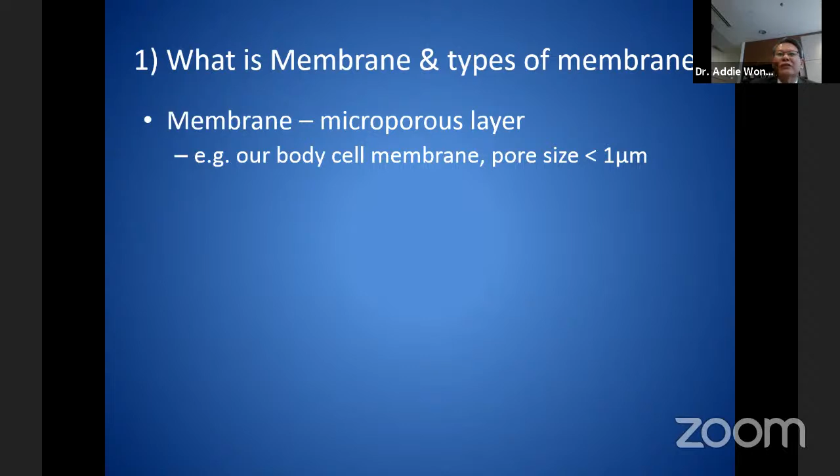What's membrane? Membrane is a microporous layer. Our body cell membrane, for example, those are membranes. The pore size must be below 1 micron. From 1 micron downward is membrane. When you talk about membrane, from 1 micron down to 0.1 micron is classified as microfiltration. Ultrafiltration means 0.1 to 0.01 micron rating. Nanofiltration is 0.01 to 0.001. RO is below 0.001 micron.

In fact, RO is not so much working on straining. It works a little bit on the surface tension principle and the pressure. Membrane is relatively expensive for water treatment, and the operating cost as well, but it produces excellent water quality. Why membrane, since it's expensive? Because there are pollutants such as Cryptosporidium and Giardia, those are protozoa. There are toxic algae, for example, Anabaena and Microcystis.

There are many motile microorganisms, and sand filters are not able to capture them because they can move in between the sand. They pass through the sand filter because they have flagella, they are mobile. For example, Dinoflagellates, the red type, Euglena, which is a toxic algae, Copepods, Cladocera, water mites, and others. Later I will show some photos. So membrane will give us better control and better water quality, of course.

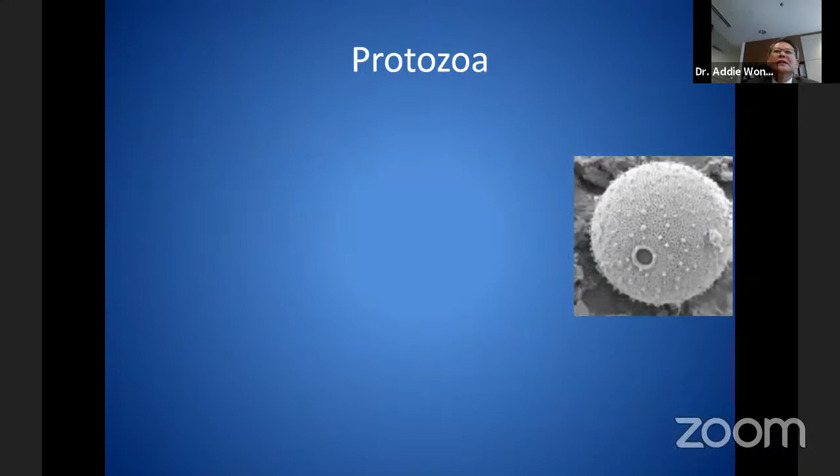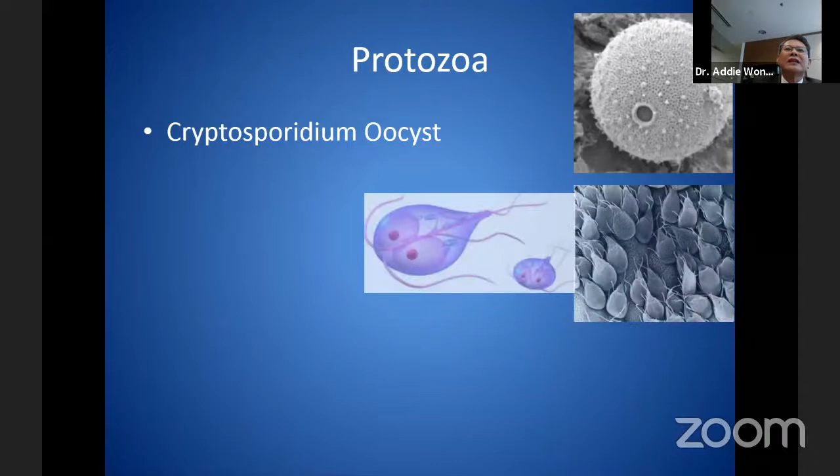This is a photo of Cryptosporidium oocysts. They need a very high disinfection level, very high CT chlorine, to inactivate them. So we need membrane to remove them, because most of the chlorination that we do can't inactivate them. This is Giardia, also the same thing, and Entamoeba. This is how it looks.

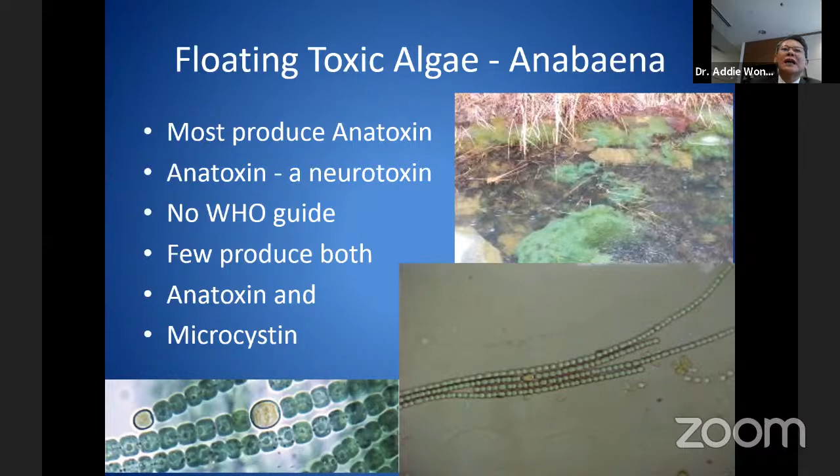During this season, people cannot eat seafood, shellfish, because the algae die and sink into the water, and then the shellfish, all those clams, lala, eat them. They accumulate the toxin, so it can be dangerous. Sometimes in Africa, in a whole dam, the normal green algae turned into Dinoflagellates. It can be very dangerous.

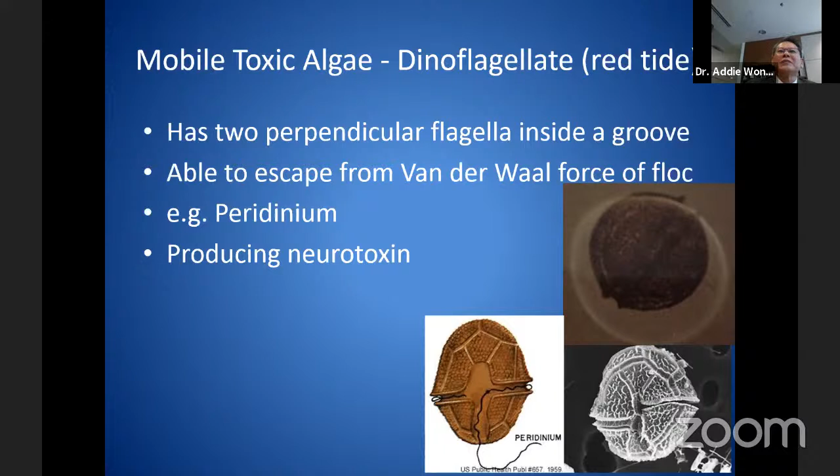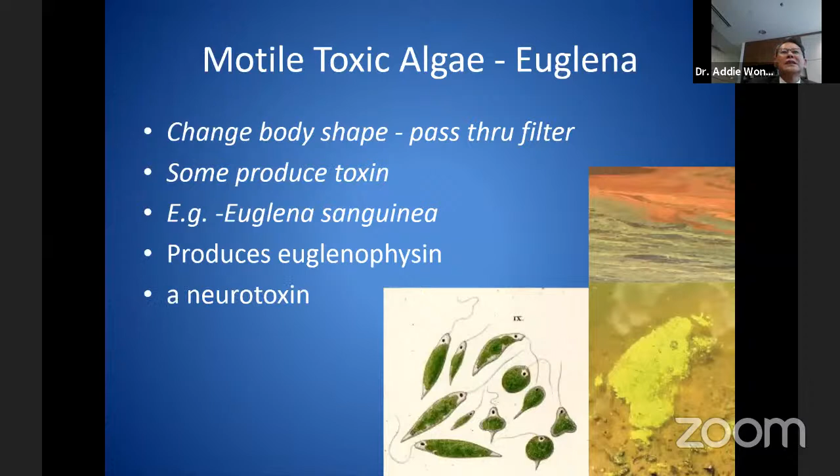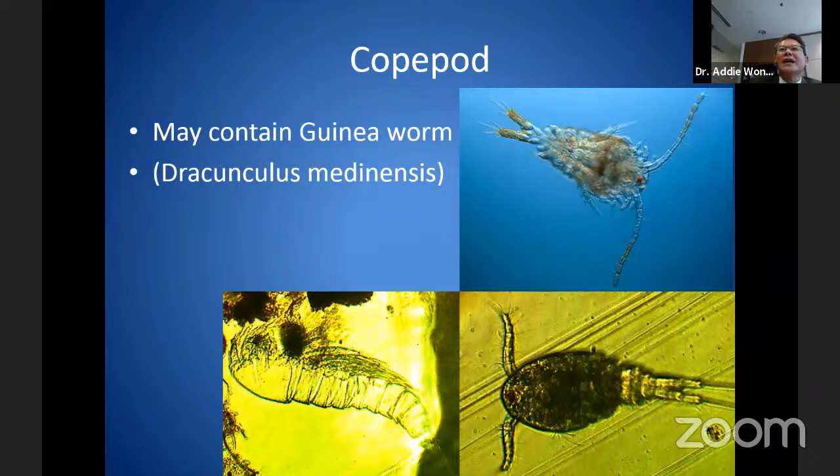But what is worrying is inside this copepod, they can have a type of guinea worm. They call it Dracunculus medinensis. So if somebody is infected by this, this one can infect copepods and then carry infected larvae inside the copepod. That means the creature I just showed. So inside the body, they may have the worm, and chlorine cannot kill the worm inside the body of this copepod.

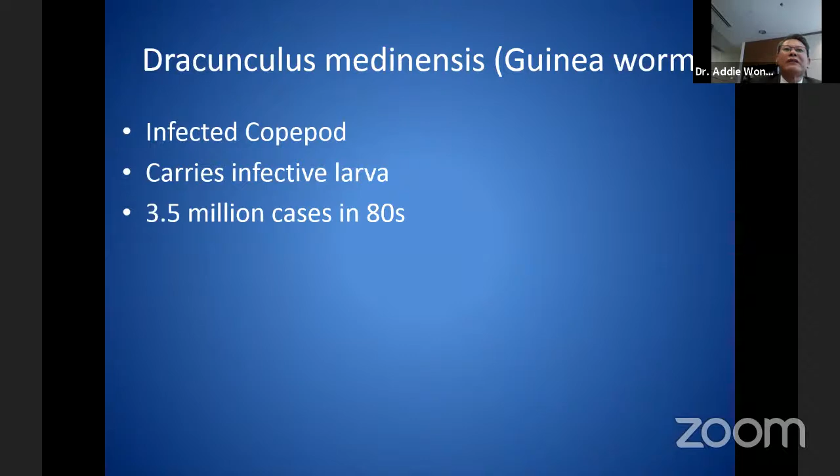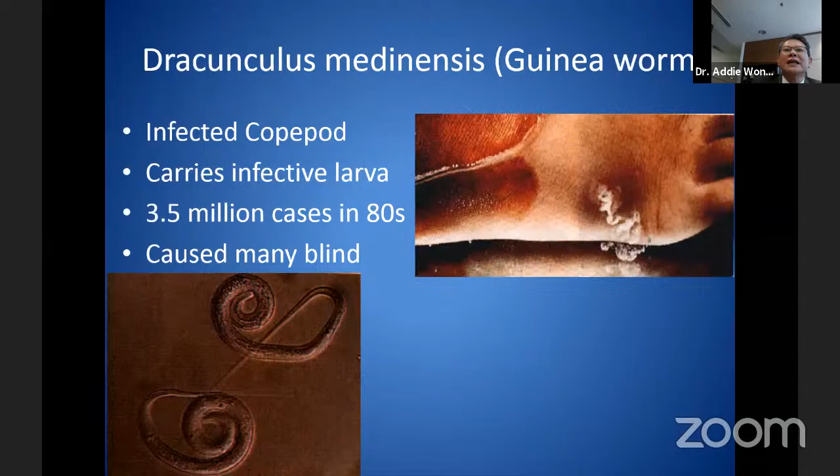So in this case, in the 80s, 3.5 million cases were found, and many African people went blind because of this one. Because the worms grow on your skin, you can see like this, and then it will come out from your leg or other part. If they get into your eye, the eye is blind, right?

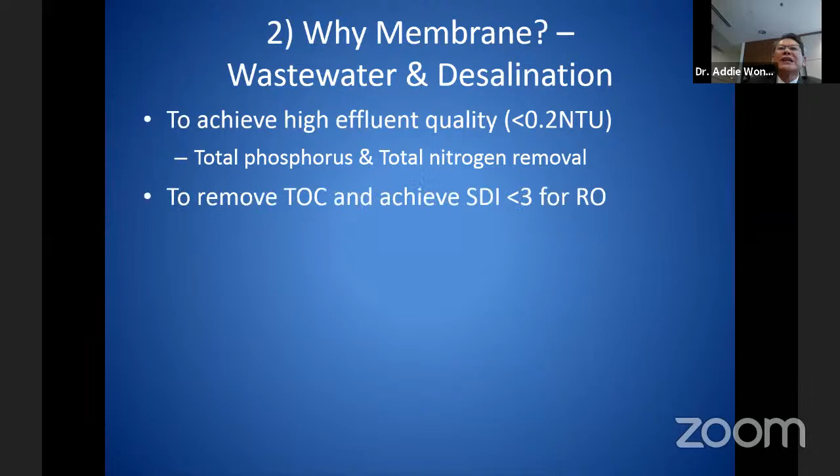So why membrane? Wastewater treatment and desalination need it because we need to achieve high effluent quality before it gets into the RO, or we need to treat the water to a certain standard, such as in China, where we need to do MBR, treat the water and discharge back into Hangzhou. So to remove total phosphorus and total nitrogen, to remove total organic carbon, and achieve a silt density index less than 5 or 3 for RO feed.

MBR increases the activated sludge concentration, the load of the sludge, so there's a lot of sludge inside the system. They can eat and make the wastewater treatment much faster, and reduce your footprint. That is the function of the MBR. Without the membrane inside, you can't do that. So you put two in one, it becomes an MBR.

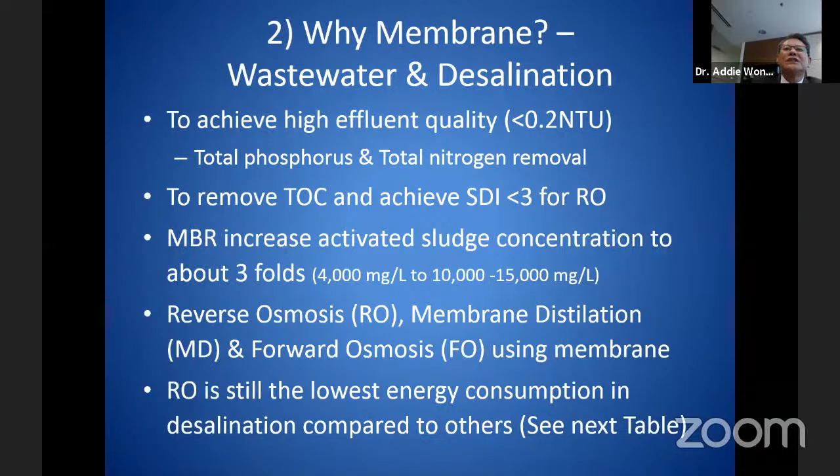So reverse osmosis, you need membrane. Membrane distillation, you need membrane. All this is for desalination. Forward osmosis is also using membrane. So if you compare all the technology for desalination, RO is still the lowest energy consumption compared to other technology. So here I show a little bit of other technology.

So polymeric membrane, there are many types of membrane. One of the materials is polymeric. So you can have PAN, polyacrylonitrile. You can have PES, polyether sulfone. You can have PVDF, polyvinylidene fluoride. You have PVC, like the PVC pipe you use. So these are the materials that can be made into membranes.

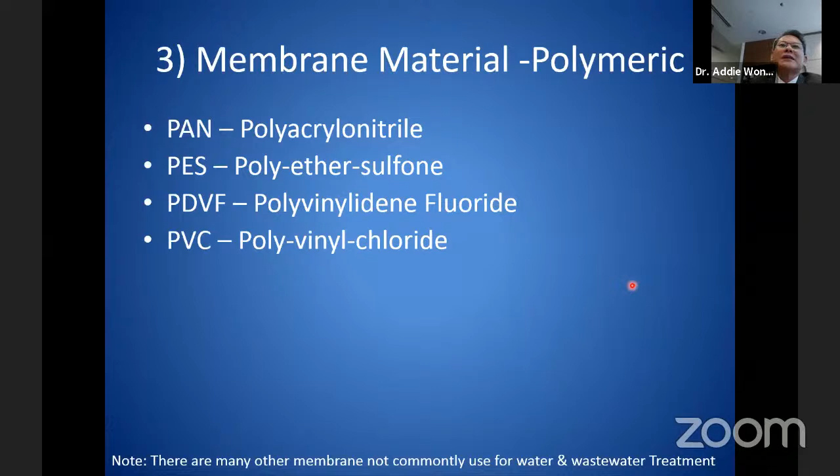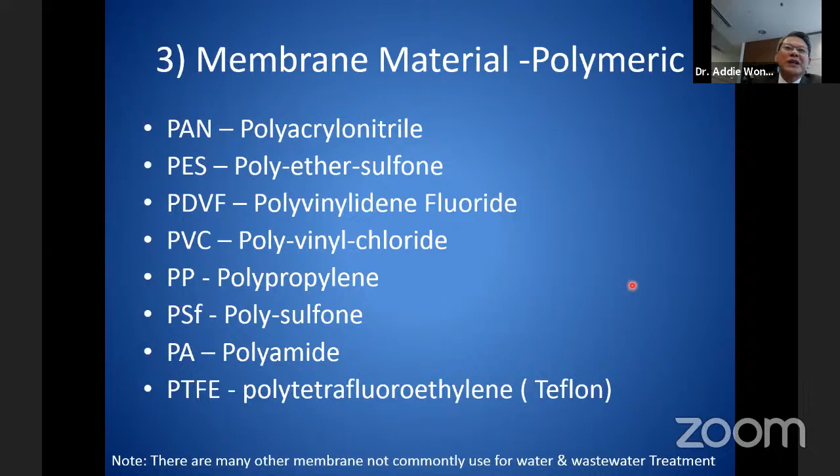Polyvinyl chloride, very common. Polypropylene, very common. PSF, polysulfone, you also have. PA, polyamide, is common. PTFE, which is Teflon, is also common. There are many other membranes not commonly used for water and wastewater treatment, but in other applications, like cellulose, for example.

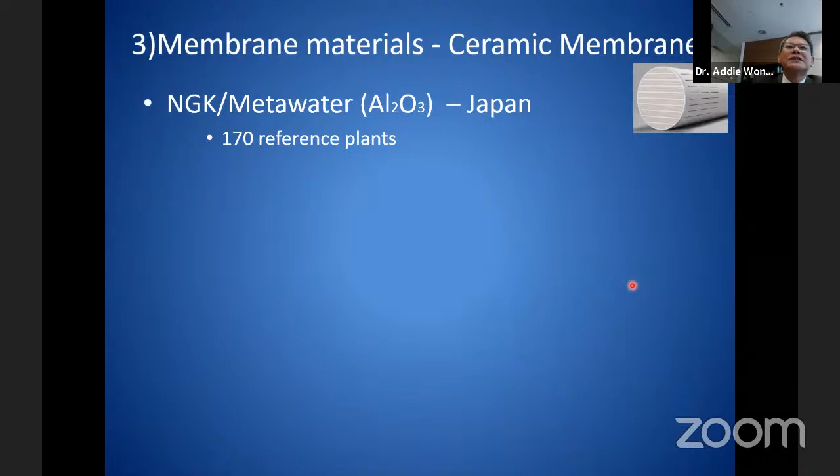So membrane material, ceramic. One example is NGK Metawater, aluminum oxide, from Japan. They already have 170 reference plants. The second one is LiqTech, silicon carbide, from Denmark. There are already a few plants. I'm not so sure what the record is at the moment. At least I know Malaysia got this one.

One of the water supply operators in Malaysia has one of these, a small plant. Atech is from Germany. Meidensha is flat sheet. Jiwu, Microsphere and Yixing are from China. Maybe there are more from China now; this slide may be slightly outdated. TAMI Industries from France. So there are more and more ceramic membranes in the market now.

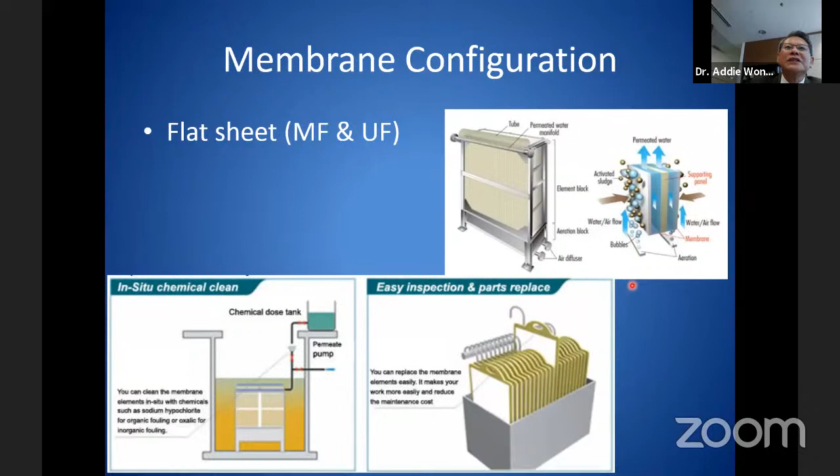So membrane configurations. It can be in the shape of flat sheet, in this way. In the flat sheet, you always need bubbles to scrub the membrane surface, to remove the foulant that sticks on the surface of the membrane, so that the membrane can continuously filter the water. Hollow fiber is quite common.

Some outside in, like my right hand side one, this is in this, sorry, the thing doesn't move. All right, I need to put on the laser pointer. Oops.

It doesn't work. But on my right hand side is the outside-in, left hand side is the hollow fiber.

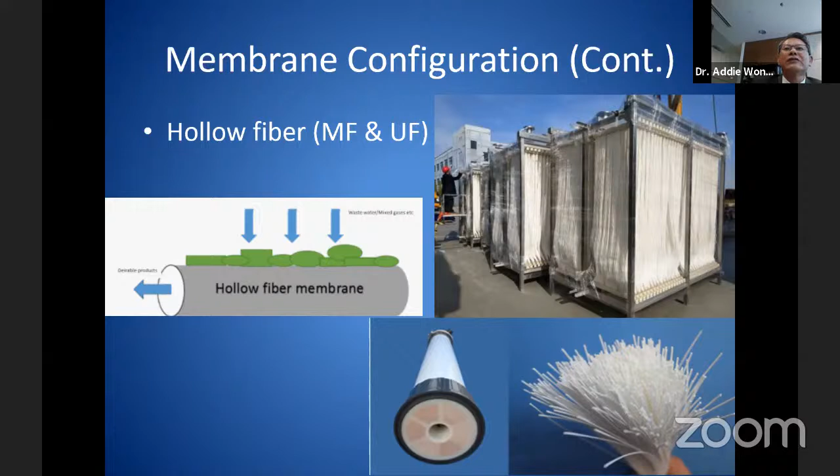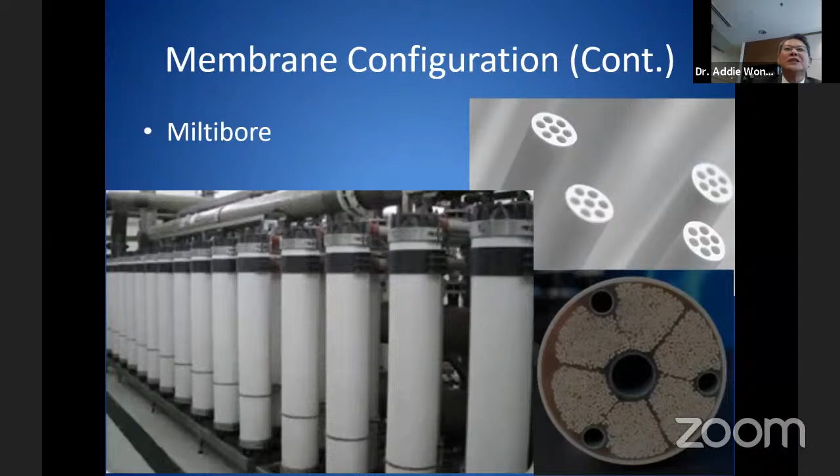Right. So they are like more advanced from hollow fiber. After the hollow fiber, it's now getting very popular with many installations, because this multi-bore membrane is more robust than hollow fiber. Hollow fiber is very easy to break. Once it gets choked, with the mud plugging the membrane, the pressure goes into the others, so the hollow fiber will break. So they are not so strong. This one is much stronger.

Now coming back to the example of those ceramic membranes in Malaysia. We have a few, like Penang. Selangor has two, one in Sungai Rumput, the other one in Kepong. Kelantan has one, Wakaf Bunut. Hartalega already has phase 1, 30 MLD. I'm not so sure about their phase 2, another something like 30 MLD is ongoing. So those are the brands. I'm not going to spend too much time on it.

Some run on upstream clean water, some run on muddy river water, and some run on groundwater like the Kelantan one.

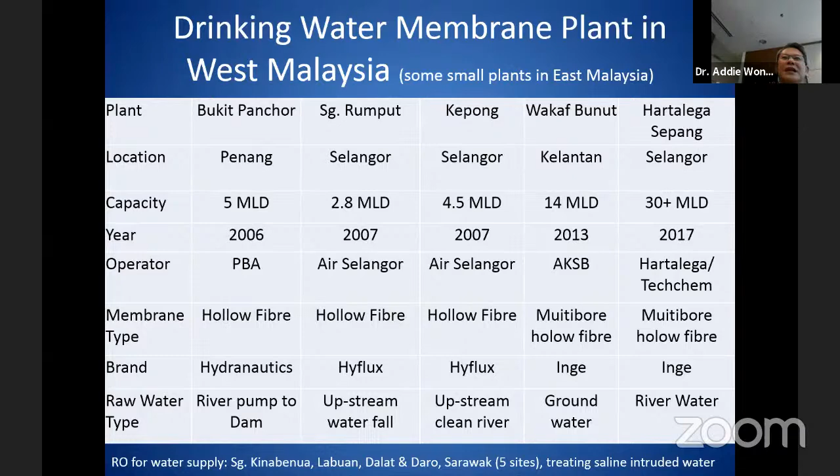So what is the comparison of ceramic and polymeric? Here you can see polymeric membrane, for example PAN, the pressure can take only 3.5 bar. The PES multi-bore I just showed, one fiber has 7 bores, can take slightly more than 10 bar. The ceramic membrane can take above 20 bar. For chemical resistance, they are getting better and better, and ceramic is very resistant. So life expectancy is higher on ceramic. Polymeric depends; PES now can go for 10 years or slightly more.

For chlorine resistance, this is less than 100 ppm for 1 hour. This is less than 200 ppm for 1,000 hours. Ceramic membrane has no reaction, which means you can continue to put oxidant and filter, no problem. For backwash pressure, polymeric can't take such high pressure. Normally in practice ceramic uses 5 bar high pressure backwash. Instead of using filtered water to backwash, the system can use air to push out what is remaining in it.

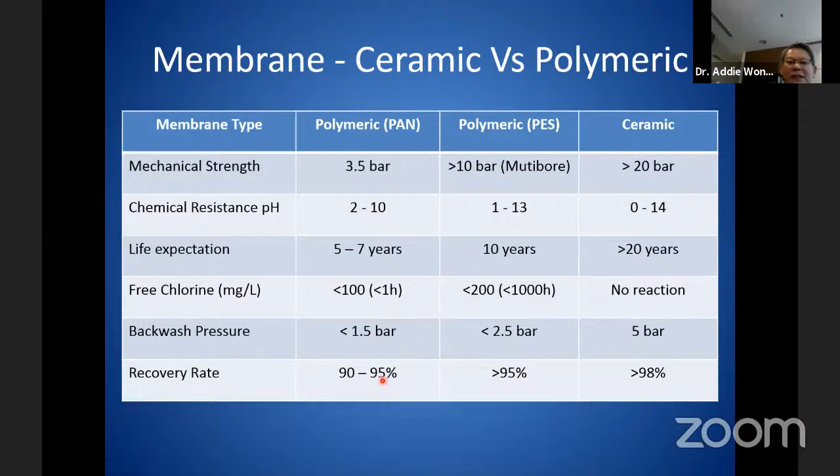Next, this is a case study from 2013. It could be a little bit outdated, but this is what I have at the moment. For capex, comparing polymeric to ceramic, ceramic is more expensive. The operating cost is the same. Membrane replacement is 5 to 7 years; this one is more than 20 years. For the 20-year life cycle cost, the ceramic membrane is slightly lower, even though it is more expensive in this case. But now polymeric membranes are getting cheaper and cheaper, so they can be about the same.

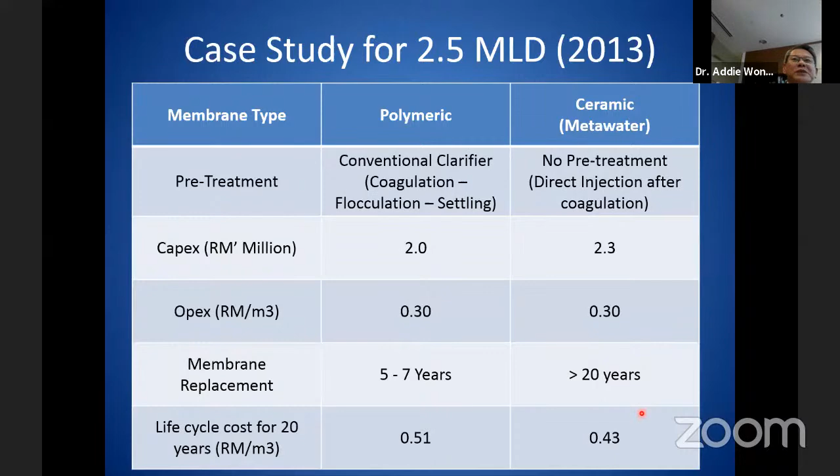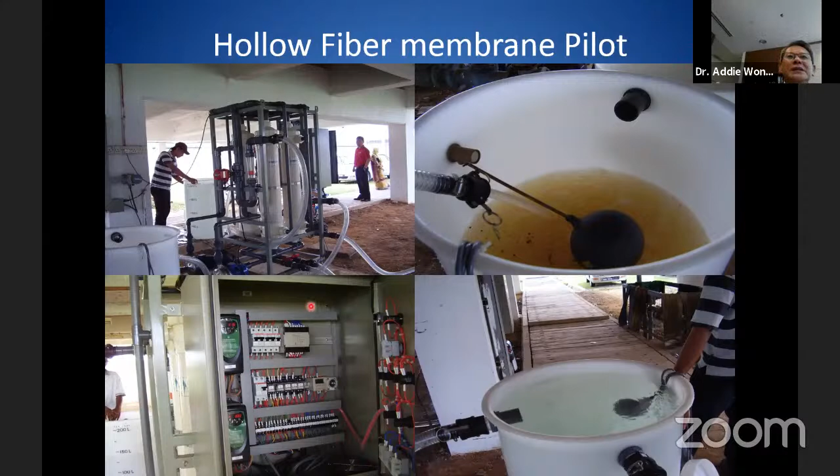So this is a photo that shows the hollow fiber membrane. Inside there's a lot of hollow fiber, just like straws. So you can see the raw water, which could be 70 to 80 NTU. It passes through the membrane and you can see immediately crystal clear water coming up, which is less than 0.5 NTU. This just shows the simple system in the box to control the membrane.

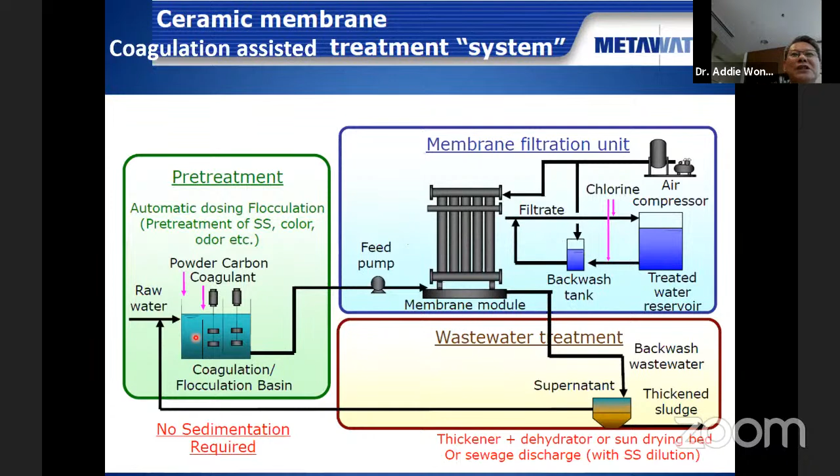So talking about this coagulation assisted approach, the main key point is we do it without the sedimentation tank. There are some membrane systems doing the coagulation before the membrane filtration, so you have another system. This one is a very small system, a very small tank. You don't need sedimentation to separate. Once it is coagulated, the particles are captured in floc, and it is not so easy to pass through the membrane. So this is how the ceramic membrane pilot plant looks like.

So I want to emphasize, with the coagulant assisted, the true color is removed very significantly, from 22 to 4 or from 43 to 2. If we use any membrane without the coagulant assisted, the true color will be about the same. Remember, when we do a true color test in the laboratory, we use a 0.45 micron membrane to filter before we do the color test. It's the same principle. Without coagulation, the color removal will be very limited.

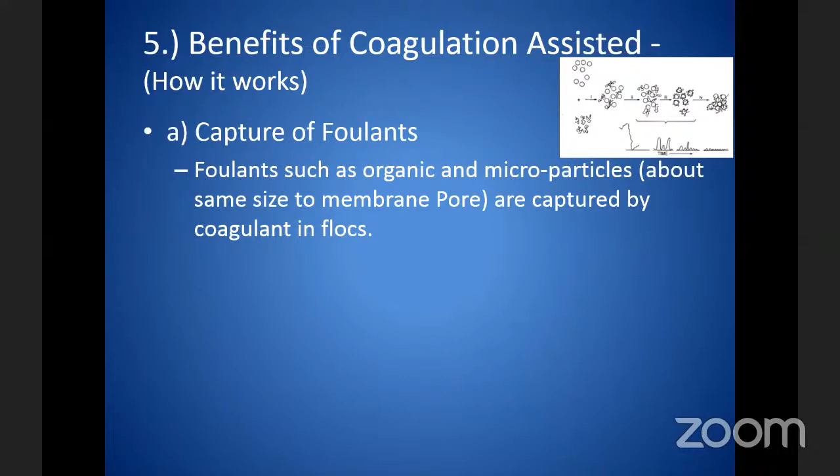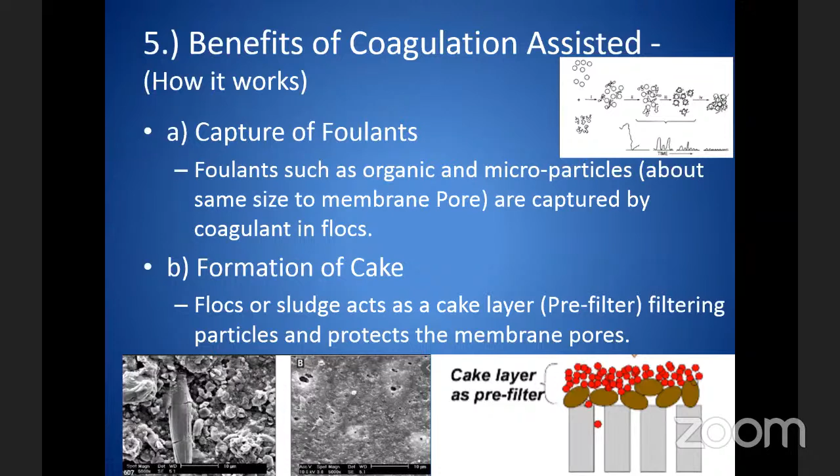After they capture these, the floc forms a cake layer, which acts as a pre-filter. It protects the membrane pore, meaning you already add another layer to filter before the membrane. You're not using the membrane pore to filter, you're using the cake to filter, which is the sludge or the floc itself. That's how it works, you can see it here in the picture. There's a cake layer that functions as a pre-filter. That's how you get all those benefits.

So in summary, if you use coagulation assisted for membrane, you will have better filtrate water quality.

You will prolong your filtration runtime. That means your backwash, you don't have to backwash so frequently, so you will lengthen your CIP frequency. That means instead of doing it weekly, you need to do it monthly or even longer. So with that, you will extend your membrane lifespan.

Beside that, this will also enhance the treatment of backwash water or sludge. Without coagulant, this is very difficult to treat. But with the coagulant or even with polymer, the sludge will separate from the water, so it's very easy to treat.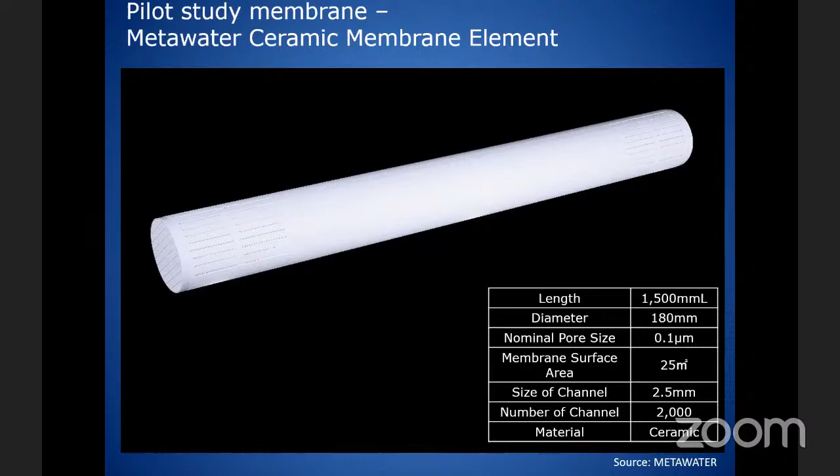Now let me show you the material, the membrane that we have piloted, the ceramic membrane that we use. This is the Metawater ceramic membrane. This is how the membrane looks like. You can see the so-called slit and all that.

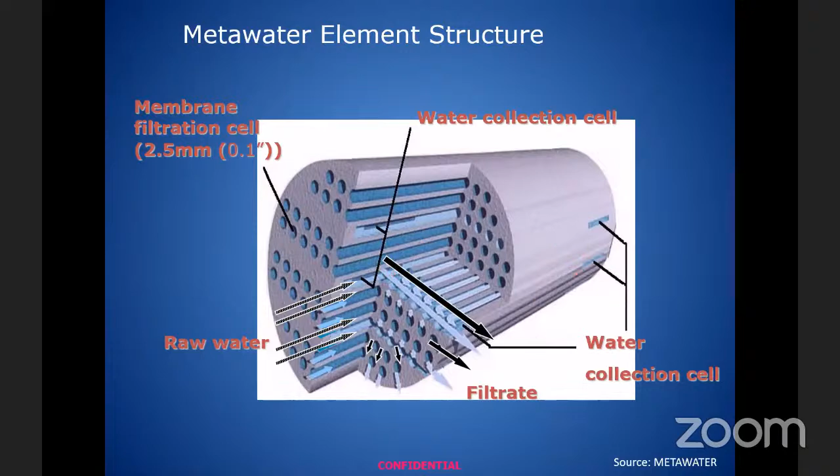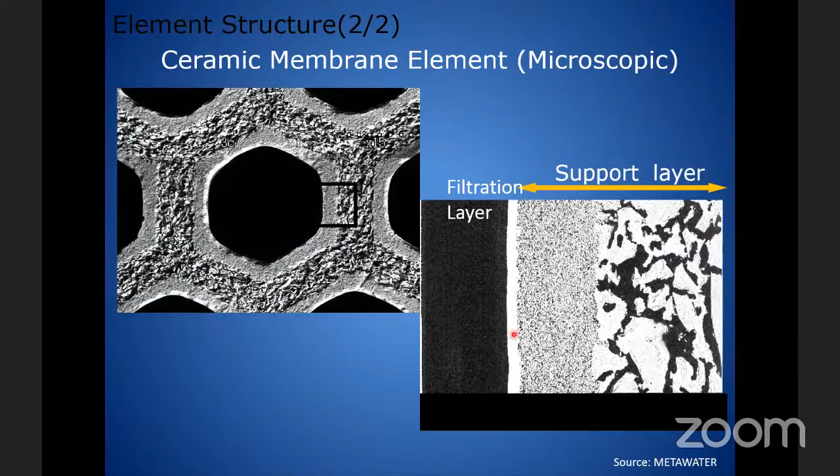Using my laser pointer here - the water comes in here, it comes out from the side. That's the slit of the membrane. Next you can see this is the enlargement of the membrane, so this is the channel, the water goes in from there, then it will filter through this filtration layer, and the others are the support layer of the ceramic membrane.

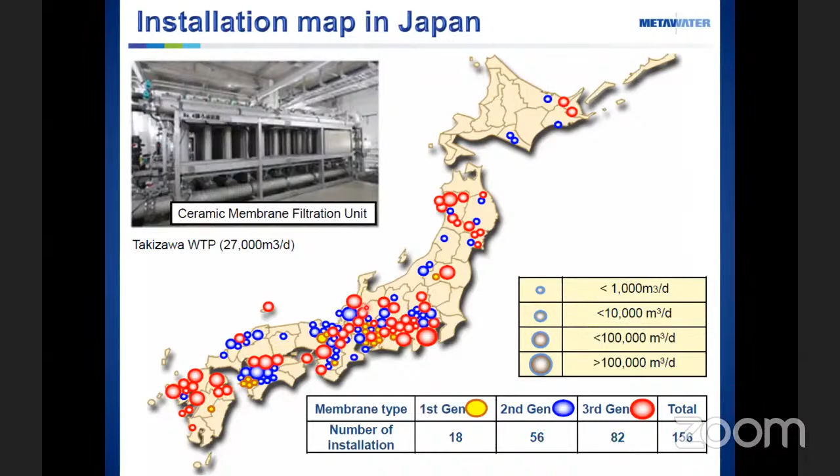This ceramic membrane, 170 installations are all over the world - in America, in Europe, and in Singapore. The biggest one is in Singapore, 180 MLD. These are the separation, the different generations of those membranes in Japan - total will be 156. So this is the market improvement of the membrane. I do not have the updated one, I'm sorry, so it's coming out.

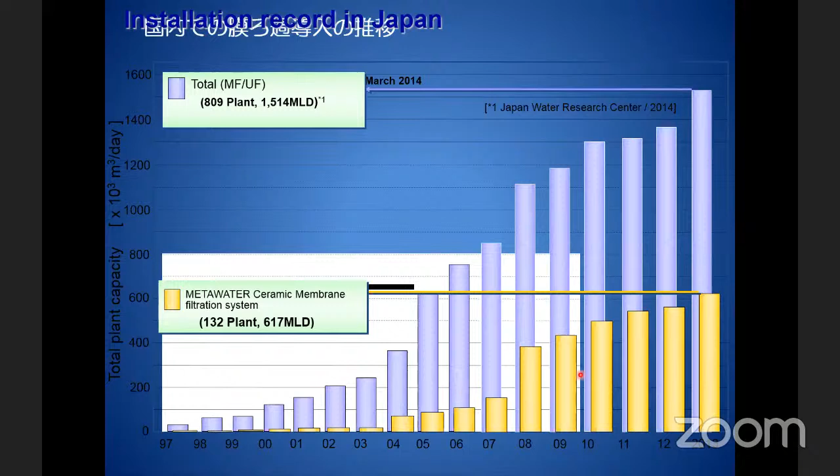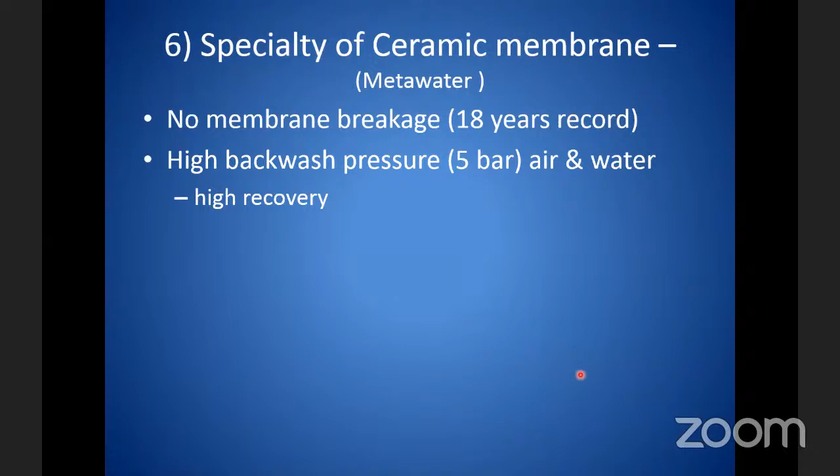So the specialty of this type of ceramic membrane, Metawater - it has recorded no membrane breakage for 18 years. High backwash pressure can be applied, even higher - now it's 5 bar. Normally, those polymeric membranes cannot backwash with such high pressure. So therefore, you can have high recovery. You don't use water to push out the concentrate, you use air to push out the concentrate.

Because it is ceramic, it is able to operate with organic coagulant. If it is polymeric and you use organic coagulant, it will blind your membrane - you cannot recover back. It will destroy the membrane, it will block all the pores.

And then it will produce non-scheduled waste sludge, because the sludge produced is not using aluminium-based coagulant. If you use PACL, of course, it will still be scheduled waste, or alum is scheduled waste. It has low energy cost, and it will lengthen the CIP interval.

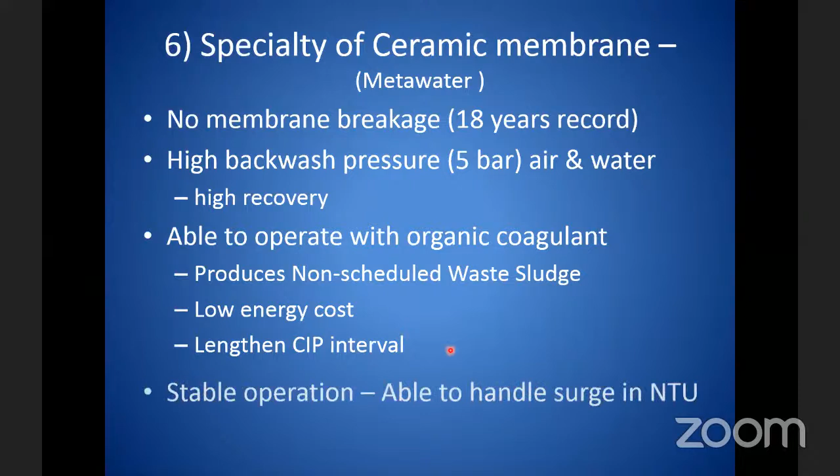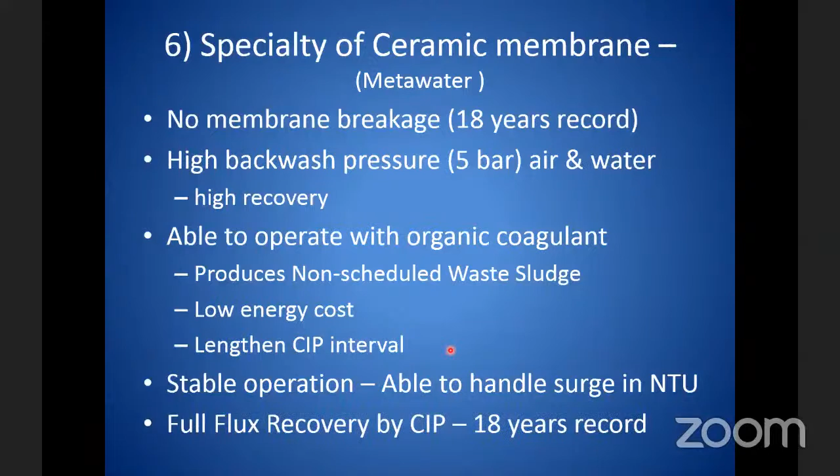It is stable in operation, able to handle surges in NTU. It has had full flux recovery for the past 18 years. Here it shows a record for the Metawater ceramic membrane, that they can get back the flux even after 18 years.

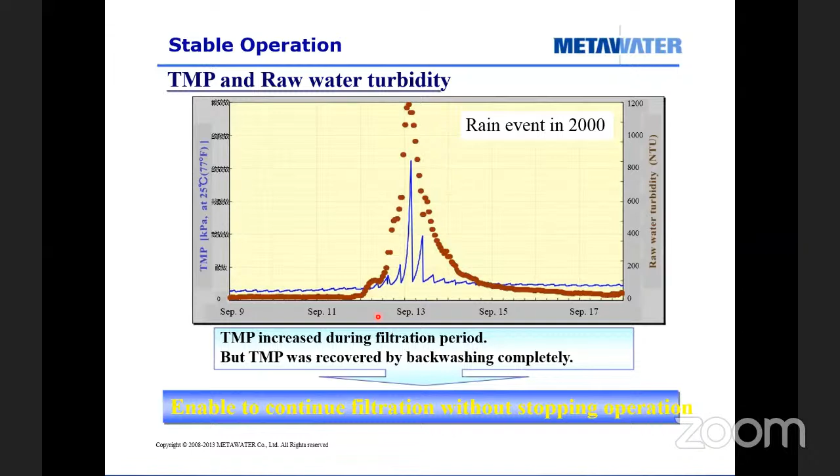In general, the advantages of ceramic membrane - it is low life cycle cost, it is sustainable, long lasting, low energy cost. It is robust, low risk, unless you drop it after it's already installed. So it is very robust.

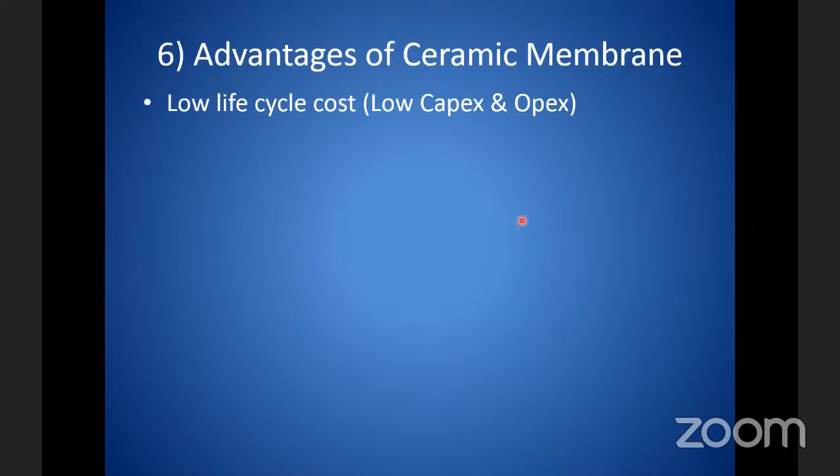You can use very strong chemicals to do CIP, clean the place, soak with very strong chemicals, and it doesn't affect the membrane, and you can get back your flux, your flow rate. Simple to operate, large channel for direct injection of coagulant. The channel is 2.5mm, so it won't easily clog by the floc. You can push it, and with the backwash of 5 bar, it will not clog the channel or the membrane, not like normal hollow fiber.

If you put coagulation assisted in hollow fiber, if the channel is not big enough, you may have that problem - you clog the channel, you clog the hole, not the pore of the membrane, but the channel that goes into the hollow fiber. If you have a bigger channel, such as the multi-bore, you will have some advantage like that. But with the multi-bore, you may not be able to use polymer or organic coagulant, because it will blind the polymeric membrane. So it's able to treat very turbid water, such as backwash water.

Ceramic membrane is able to couple with other technology. Since it has a big channel, it's easier to put in powder activated carbon, to couple with powder activated carbon. It's also easier to work with advanced oxidation, such as ozone and UV-H2O2, which produce OH radicals, a very powerful oxidant. If it's a polymeric membrane, it may degrade or be destructed or damaged by the powerful oxidant, but ceramic membrane won't. So it has a wide range of raw water tolerance too.

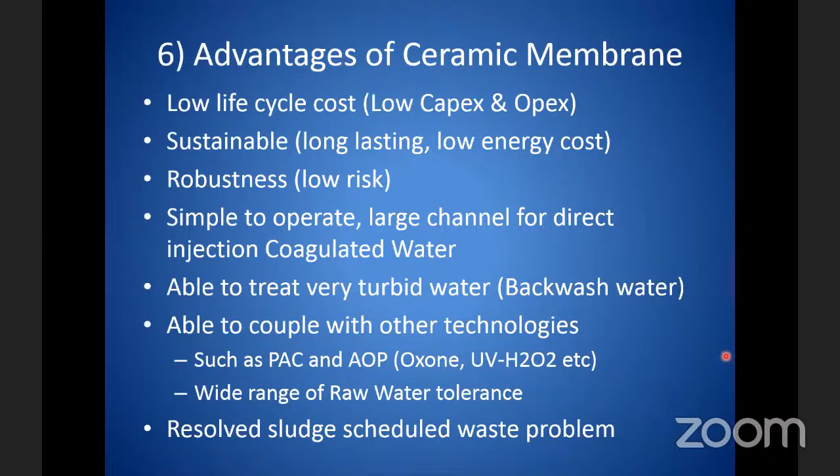Now we go to another section, which is membrane coupled with powder activated carbon. This has an effect on efficiency in removal of organic pollutants, especially PPCP - pharmaceutical and personal care products - and EDC, endocrine disruptive chemicals.

You also have longer reaction time. If you put powder activated carbon in a conventional plant, you only have very short detention time or reaction time, maybe less than that, because you have to put it before the alum dosing, so you don't have much time. But if you couple it with this kind of membrane, and if your membrane is backwashed every 2 hours, your reaction time goes from 5 or 10 minutes up to 120 minutes. So it's very high reaction time, very efficient for powder activated carbon to react this way.

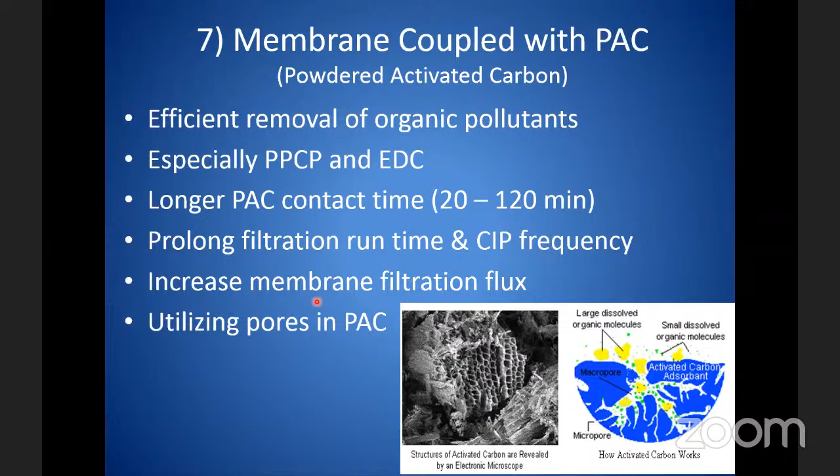You also prolong filtration time and CIP frequency, because the powder activated carbon will take away foulants that would block the membrane pores. This increases membrane filtration flux, as we discussed. Further, you're utilizing the pores in the powder activated carbon - if you have short detention or reaction time, the pores, the holes in the powder activated carbon, are not fully utilized. It's even better with superfine powder activated carbon, SPAC - you get even better results in this case.

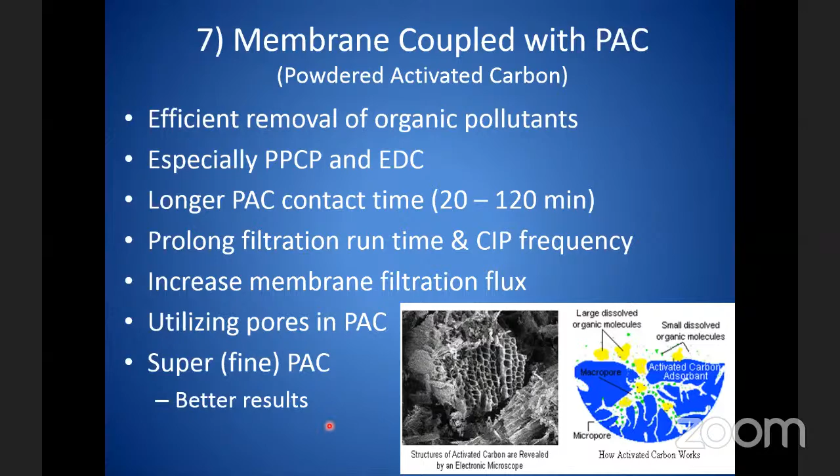I tried something: if we put powder activated carbon into the system, you can further remove turbidity from 0.16 to 0.07. You remove color from 9 down to 5, and also UV254 absorbance - as I explained, UV254 is like DOC, dissolved organic carbon - you remove another 20% more. So it's significant for turbidity, color, and UV254 removal with powder activated carbon combined with the membrane.

Membrane coupled with advanced oxidation is normally suitable for ceramic type membrane. If you use polymeric type, as I said, it may damage your membrane - polymeric cannot stand the strong oxidant. As I explained, the strong oxidant is normally this OH radical that oxidizes the organics. It will destroy and can remove endocrine disruptive chemicals, normally by destructing, oxidizing the pollutant, the organic pollutant. Most pharmaceuticals are organic - it will oxidize and break them into smaller pieces so they lose their original effect.

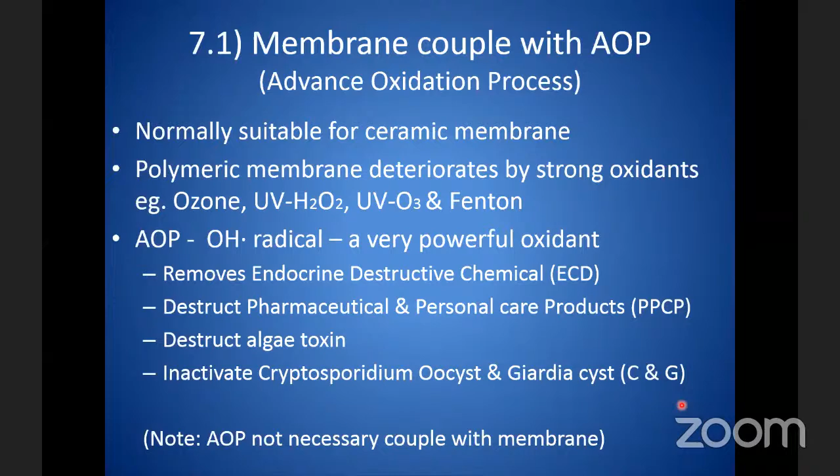It also destructs algae toxin and will inactivate Cryptosporidium and Giardia cysts in this system. Note that AOP doesn't necessarily have to couple with membrane - you can have other systems. But anyway, membrane will remove the C and G itself already. If you put AOP after it, before it, or anywhere in the system, it will inactivate the C and G. Here's another example installed in the Netherlands.

So 120 MLD, the ceramic membrane, but they install it in a different configuration where you have 192 ceramic membrane elements in one big vessel. So this is called the CeraMac system. They have the ion exchange first, and then they go to this ceramic membrane configuration. Then after that, they use UV/H2O2, and then GAC.

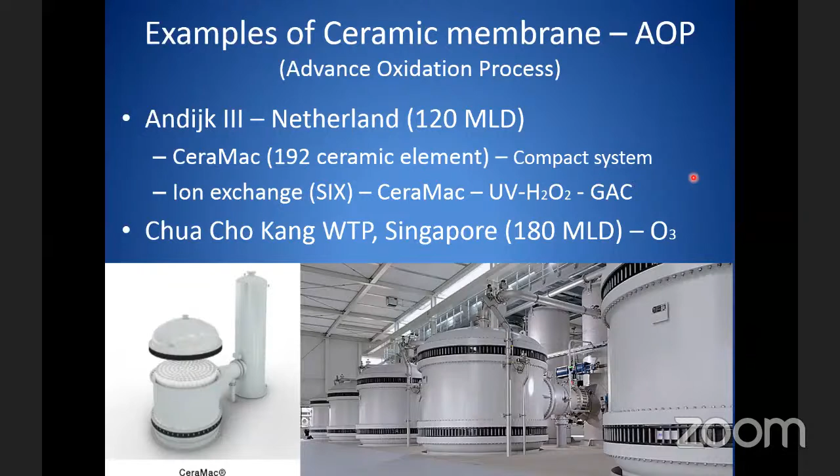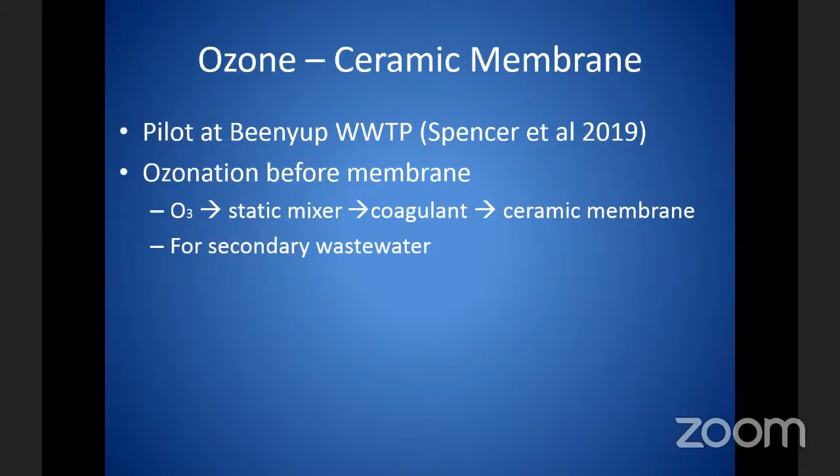So in Choa Chu Kang, when they piloted, they were using ozone before the Metawater ceramic membrane. Now they are installing 180 MLD, ozone ceramic membrane. Recently there's another pilot done with a big configuration, published by Spencer. They use O3, static mixer, coagulation, and then immediately inject into the ceramic membrane. There may be residual ozone in the system, but it won't affect the ceramic membrane.

This is for secondary wastewater. The results found that with the ozone they can increase the flux into the range of 150 LMH to 250 LMH, where UF is normally designed at 50 LMH.

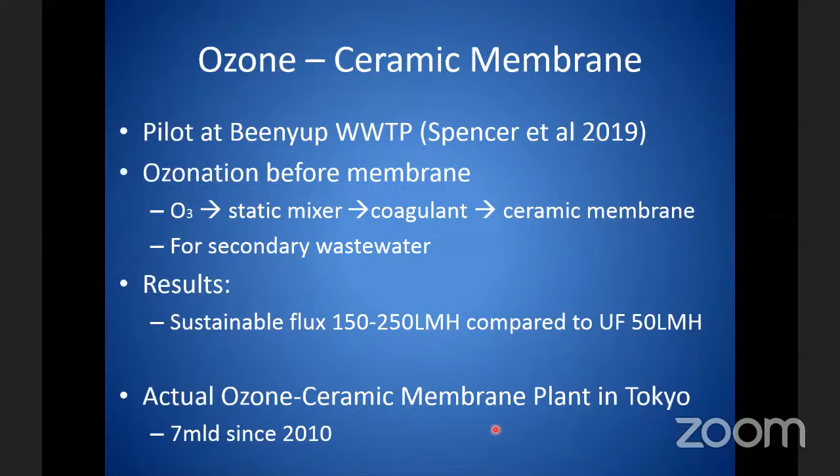There is an actual ozone ceramic membrane plant in Tokyo, 7 MLD, treating sewage for water recycling for toilet flushing since 2010. The photo is a bit small, but this is how the plant looks. The secondary effluent comes from here, then they use a biological filter, then a pre-filter. Then they use ozone, and from there it goes into coagulation and flocculation, then into the membrane for reclaimed water.

This has been there for about 10 years. They produce good quality water that complies with Japanese and international standards, and it is still ongoing at the moment. So these are the advantages of the ceramic membrane.

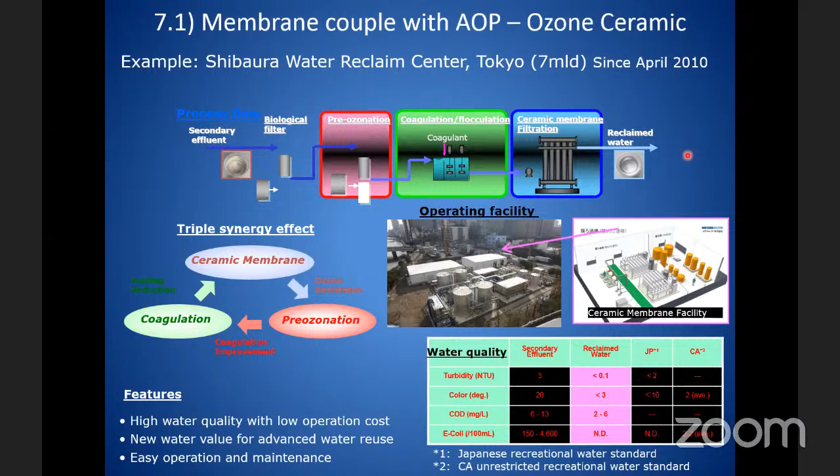Next, after the membrane, we want to move a little further into the advancement of water and wastewater treatment, which is nanomaterials in water treatment. This is actually a very big topic. Today we have limited time, so I'll only introduce a little, because this concerns the next generation of membranes. Before I get into membranes coupled with nanomaterials, I want to explain a little.

Maybe some people are not familiar with what a nanoparticle is. It is a very high surface area material with very small volume. Normally a nanoparticle is 1 to 100 nanometers, very small. Strong, stable, and durable. Material may change at the nano level, so you can induce electrical, optical, UV, chemical, or biological properties. This makes chemical and biological reactions easier.

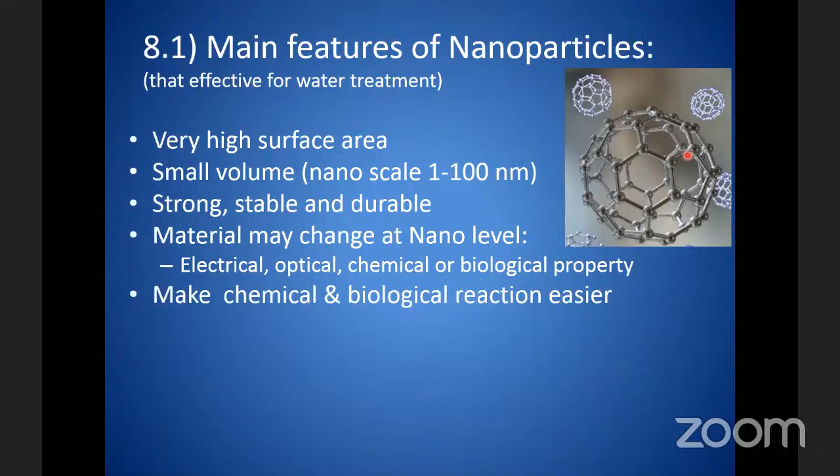It can be carbon, organic, inorganic, metallic, or ceramic; it can be any of these materials. It has applications in many fields: the electronics industry, medical industry, energy sector, and environmental remediation. Water and wastewater treatment is part of environmental remediation. So, nanomaterials for water treatment, for example:

This is carbon nanotubes for desalination. This one is almost coming to industry. Most nanomaterials for water treatment are still in the laboratory and pilot stage; only this one is coming, but it's still being fine-tuned. Low electricity cost, how does it work? Instead of 60 bar pressure for RO, it uses a slightly lower pressure.

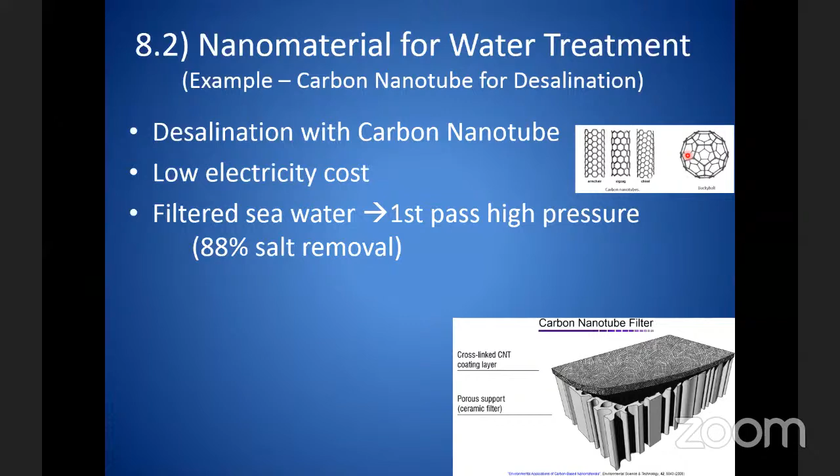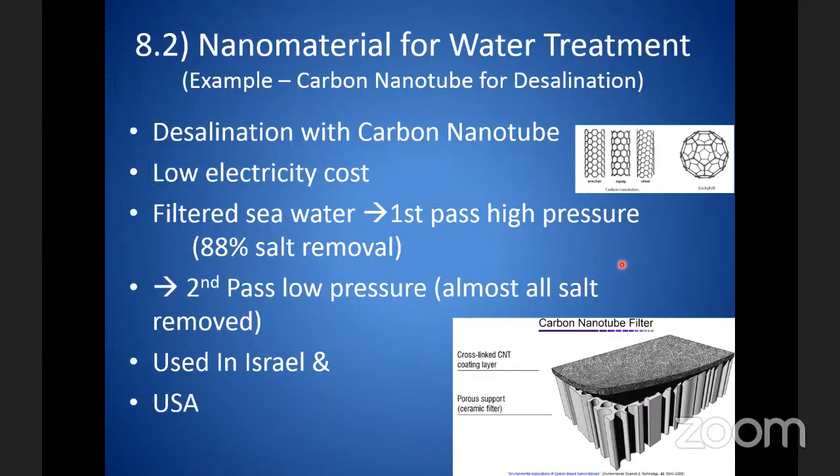The first pass at higher pressure removes 88% of the salt. In the second pass, you pass through the carbon nanotube filter, which removes almost all the remaining salt. This is how it looks: at the top is the carbon nanotube, and below is the carbon nanotube filter. It is being used in Israel and America at the moment, not fully commercialized yet; they're still fine-tuning.

Nanomaterials for water treatment: for example, nanocrystal zeolite for specific cationic contamination. We dose this in Malaysia too sometimes. We put this powder, though maybe not very fine, into our drinking water before the alum, so that it removes ammonia and some heavy metals.

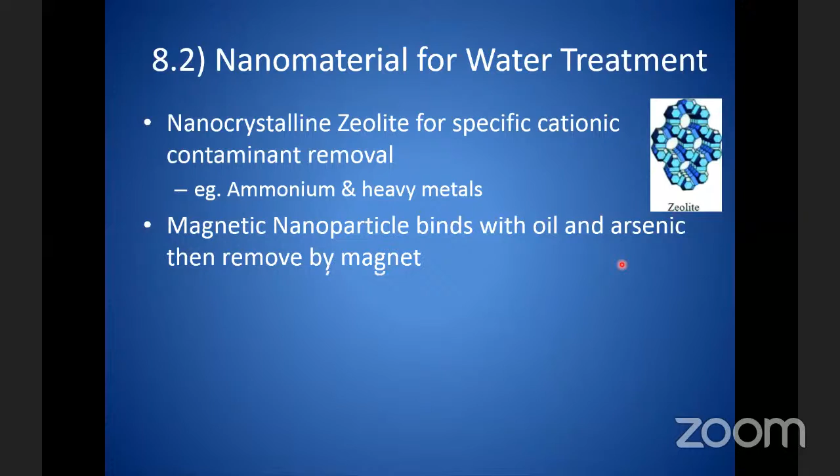Some magnetic nanoparticles bind with oil and arsenic and remove them, then the whole thing can be separated magnetically. Nanoparticles function as adsorbents for targeted contaminants such as dye, like graphene. Graphene is a nanoparticle. Nanoparticles can also function as catalysts to chemically degrade pollutants, like nanoscale titanium dioxide and zero-valent iron. Those are the things they can use.

So those are photocatalysts, titanium dioxide. So just for us to imagine, nanomaterial can be used as absorbent. Sometimes these absorbents are very high. For example, at the moment, activated carbon is normally the highest, in a very high range. We are talking about the so-called absorption capacity, which is 300 milligram per gram of activated carbon.

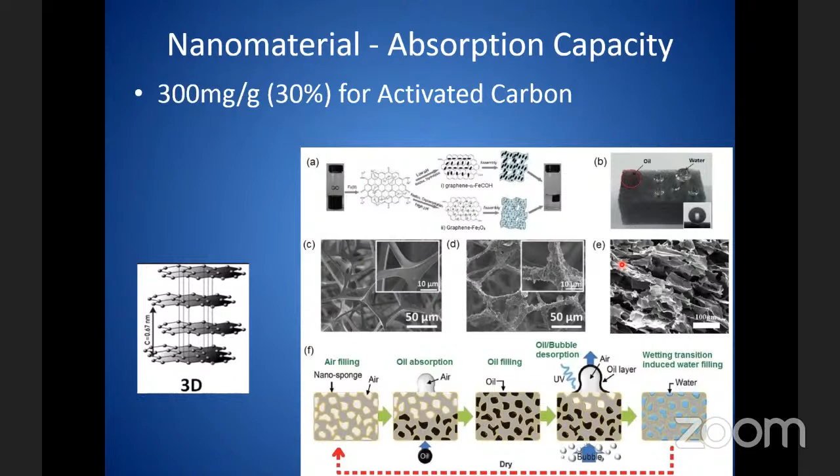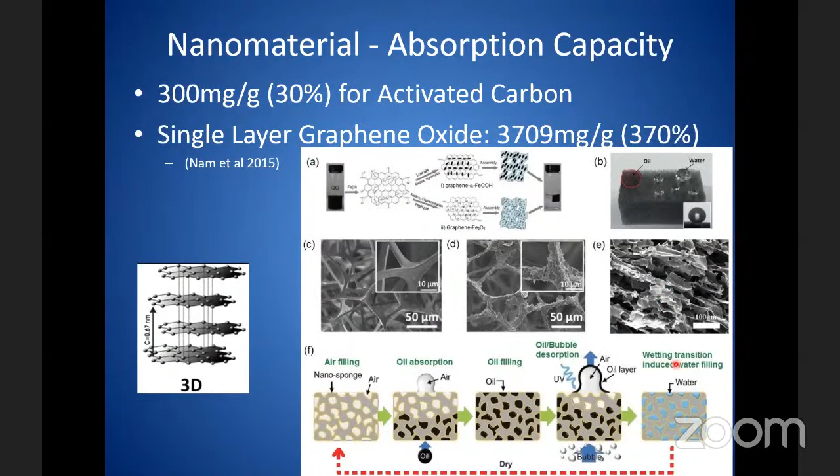So membrane coupled with nanotechnology. Normally, now the most popular one is to combine nanoparticle with polymer. So it's called nanocomposite. So this nanomaterial is combined, such as carbon nanotube, zinc oxide, graphene oxide, titanium dioxide, and so on, silver, copper, 2D material or novel ones, to fine-tune the structure of the membrane.

You fine-tune the structure of the membrane and physiochemical properties such as porosity, hydrophilicity, antibacterial, thermal stability, chemical characteristic, electrical conductivity. So for some nanomaterial membranes, you can use electricity to induce it so that it will remove the foulant or cause some reaction on the foulant. These are on the lab scale and pilot scale. Enhanced rejection, suppress accumulation of foulants. So you use UV or something else, it will oxidize those foulants, and it will also be antibacterial. So that's how it works.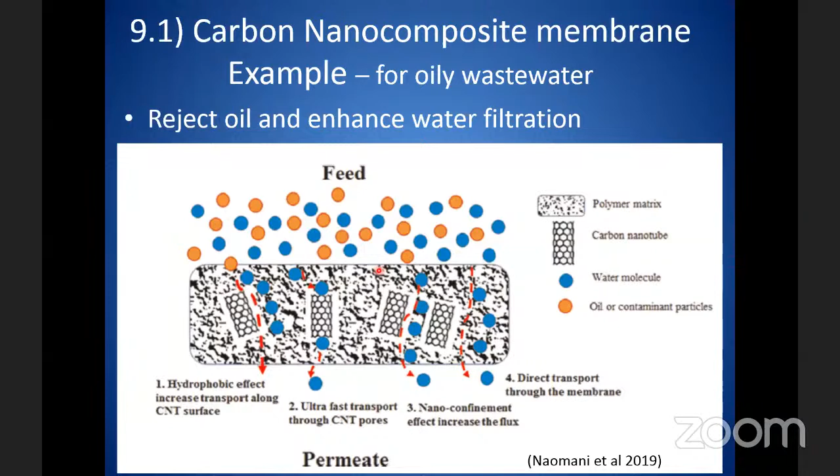And then the oil, so the orange color is the oil, the blue color is water. So all the water will be enhanced and pass through. So the flux will be higher. And then the oil will be retained. So it will increase the so-called hydrophilicity and flexibility of the membrane. So the flux will increase in this way. So these are the examples.

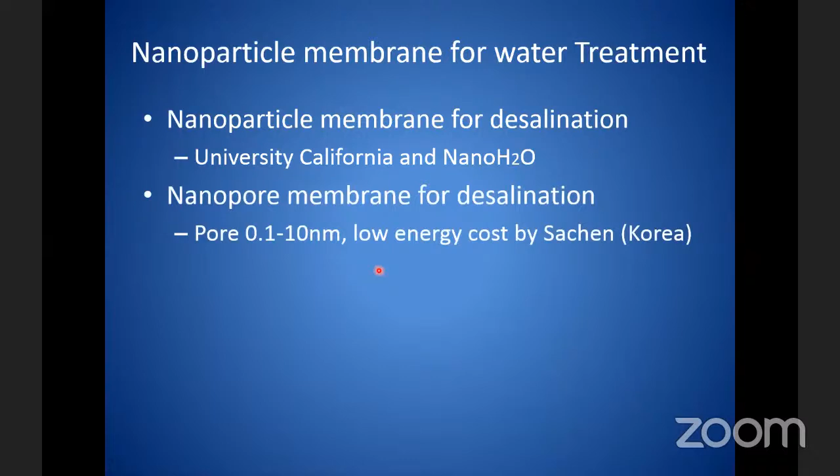So nanoparticle membrane for water treatment. These are ongoing. So desalination, University of California, and the so-called Nano H2O company. They have something ongoing with a Korean company in Korea. So they use nanopore membrane for desalination. They make the membrane with very, very tiny pores.

Just now I already mentioned, RO is actually not so much straining or filtration. It actually works on some surface tension principle. You press on, then you take the water. But this nanofiltration for desalination with nanoparticle membrane is really filtration. That means only water molecules will pass through.

Okay. So why RO? In your household, after your RO filter, you see another activated carbon filter, right? That is because in the RO system, the pore is actually quite big. Some organic material will still pass through. Although they can retain the molecules of sodium and chloride, organics will pass through. For this case, only water will pass through. The nanofiltration with nanoparticle membrane is very interesting.

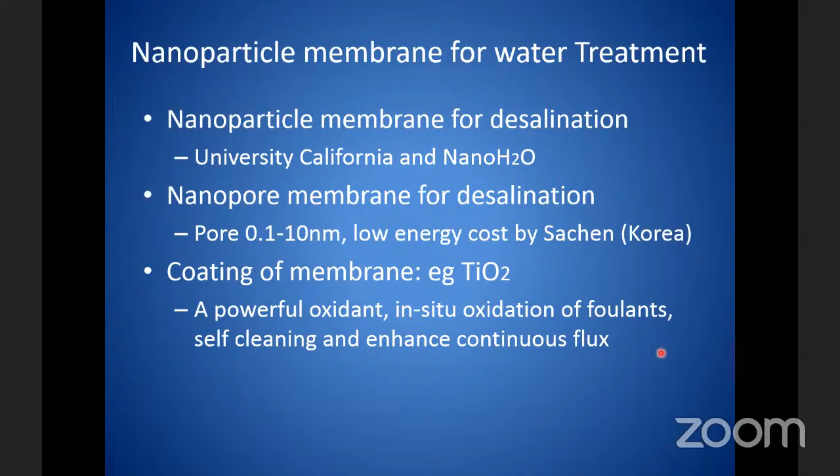So they start to put in the coating, and the membrane surface will be covered with titanium dioxide. So the pollutant, before it can blind or foul the membrane and block the membrane pore, will touch the titanium dioxide on the surface of the membrane, and then it will get oxidized and become a much smaller particle, if it is still there.

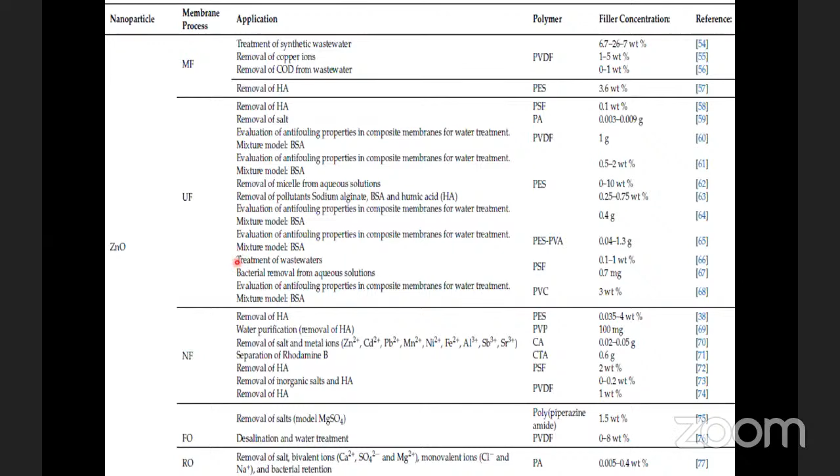So then you pass through the membrane instead of fouling the membrane. That's how it works, right? So there are actually many, but not today, because there's a time constraint here. So these are all the examples under study. For example, for UF, they are using what they call zinc oxide to do something and so on. So you can see there's a lot, we cannot finish the examples. So actually for this topic we need at least another webinar to talk about nanotechnology for water treatment.

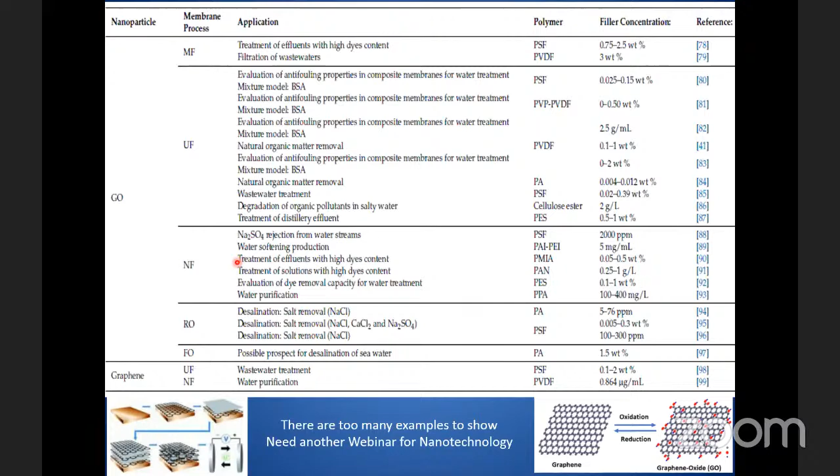But anyway, most of this nanotechnology for water treatment, besides the carbon nanotube for desalination, is not commercialized yet. They are still in pilot stage. They are still in tuning stage. Even the carbon nanotube, which is considered to already have the plant, they're still trying to do some so-called fine-tuning.

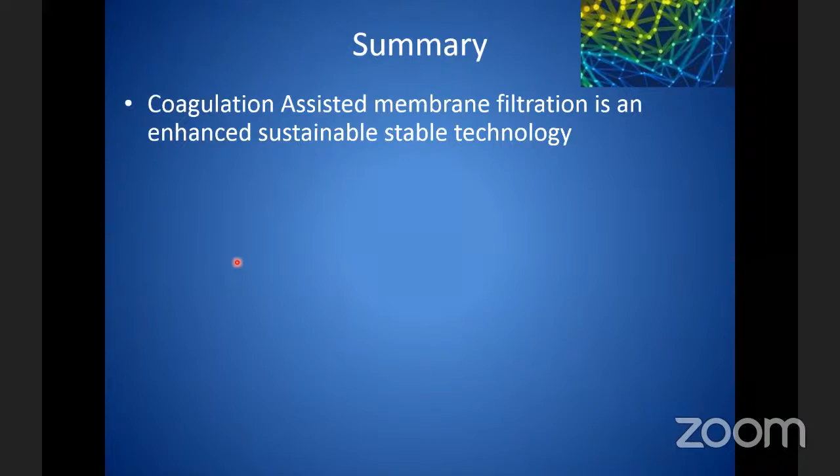So, to summarize, coagulation assisted membrane filtration is one of the enhanced sustainable stable technologies. The benefit is it will increase the flux, lengthen filtration time, CIP, and membrane lifespan. And also it will ease the sludge treatment or the concentrate treatment. So there are advantages of ceramic membrane, but it's more expensive. So polymer membranes now are getting bigger and bigger modules so that they can put in more fiber. So they are fighting with the ceramic membrane very fiercely now. So maybe they are equivalent, or they may be getting better in the market, which is possible soon.

So now with this nanoparticle and nanocomposite, it will be much advanced. It's upcoming in the treatment of water and wastewater soon. So in fact, in some very small scale settings in third world countries, they are already using nanoparticles for water treatment, but in a very small scale.

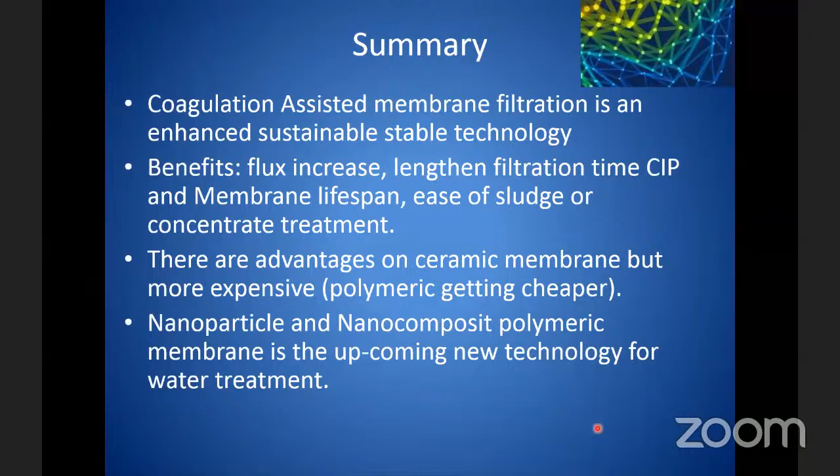Like when they want to drink some water, they put the nanoparticle in, shake the nanoparticle in the bottle, and then let the thing settle, then they can drink the water. The nanoparticle will remove all the pollutants. So they drink the water, then later they do the same again with other water. It's not commercialized, but it will help the people. That is an example of how they use nanoparticles for water treatment in third world countries. So we hope to see nanoparticles become affordable and sustainable soon. Like what I said already, some are utilized in the third world.

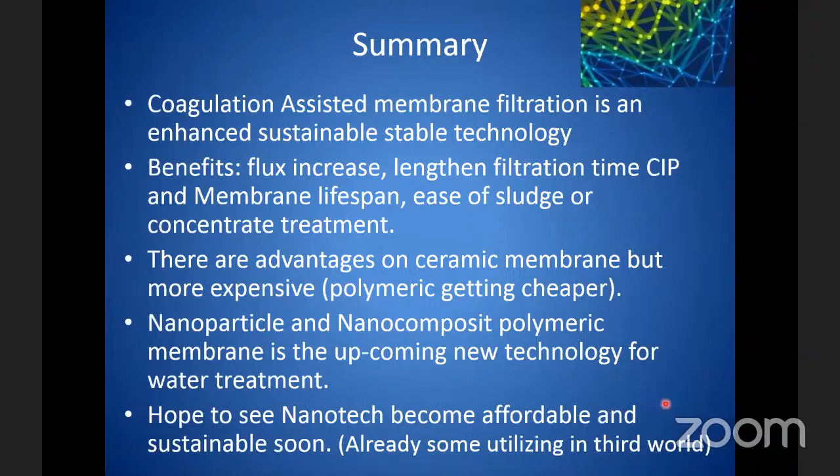Thank you. Thank you, Dr. Wong. I think you can stop your screen share. I can't. Okay, we have done it. We've done it for you. Yeah. Okay, so